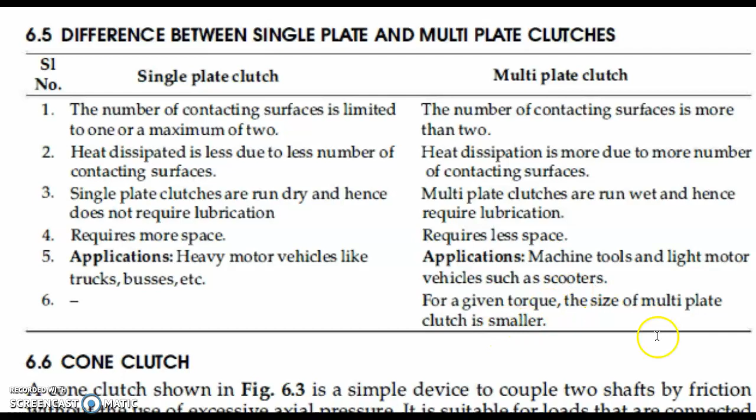Now we can identify or go for the cone clutch. First of all I can explain it with a figure. This one is a cone clutch, and the cup is attached to the driving shaft on the left side, and on the right side the cone is attached to the driven shaft, and the cup has a conical shape. There is a friction lining.

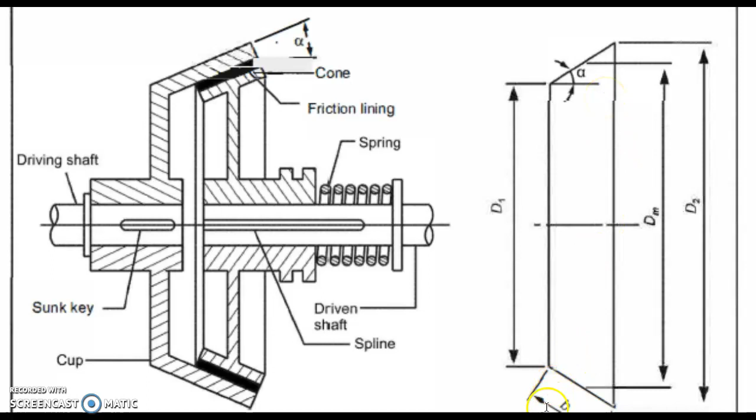It is rounded, so we have a conical shape here, and the angle alpha is necessary for the design. Then we need some values d1, dm, d2, as shown here. d1 is the internal diameter, d2 is the outer diameter, and dm is the mean diameter. One more thing, the value of b, that is the width of the clutch lining, is required.

Now we can go for the analysis part. First we can analyze the torque.

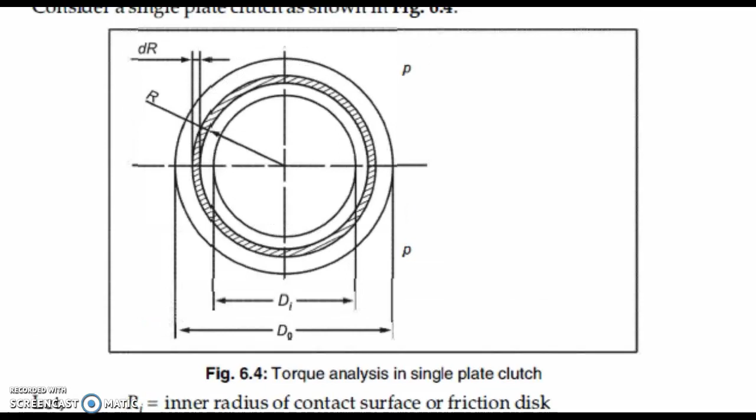This figure I already explained in the single plate clutch, but study once more. It is the side view of a single plate clutch, and we have two diameters. First one is di, the internal diameter, and another one is outer diameter, denoted as do. So we have di and do. Another one is r, capital R, the radius of the circle, and we consider a small element, denoted as dr.

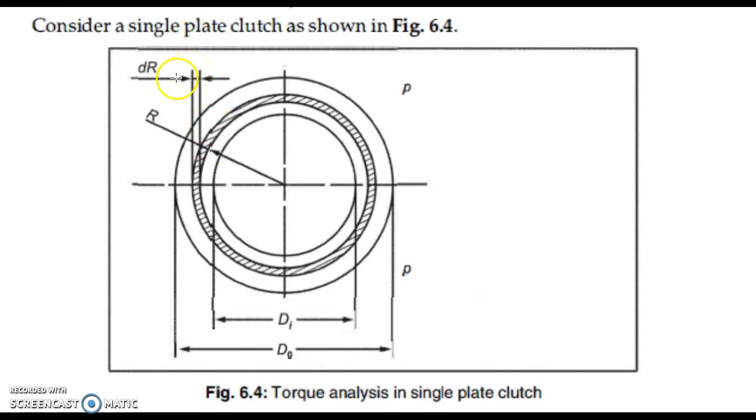These are the basic figures required for the analysis.

Consider an elementary ring of thickness dr at a radius r as shown in figure. Area of the elementary ring we can denote as dA, which is equal to 2 pi r into dr. Then axial force dFa is equal to P into dA, where dA is equal to 2 pi r into dr.

Now we can go for the frictional force. What is that frictional force? It is equal to coefficient of friction into axial force, which we can write as dFf is equal to F into P into 2 pi r into dr.

Now we can go for the torque equation. dt is equal to dFf into r, that is force into radius. We can write this as F into P into 2 pi r into dr into r, or dt is equal to 2 pi F P r square into dr.

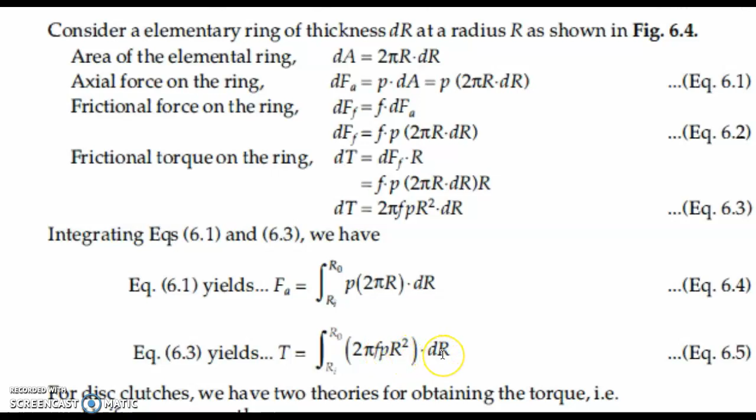Now we can go for the total axial force and total torque. How can we find the total axial force? It depends on the variable r, so we put it for integration: integral from ri to ro of P into 2 pi r into dr. Similarly, torque T is equal to integral from Ri to Ro of 2 pi F P r square into dr. These are the basic equations required for the analysis of torque and force.

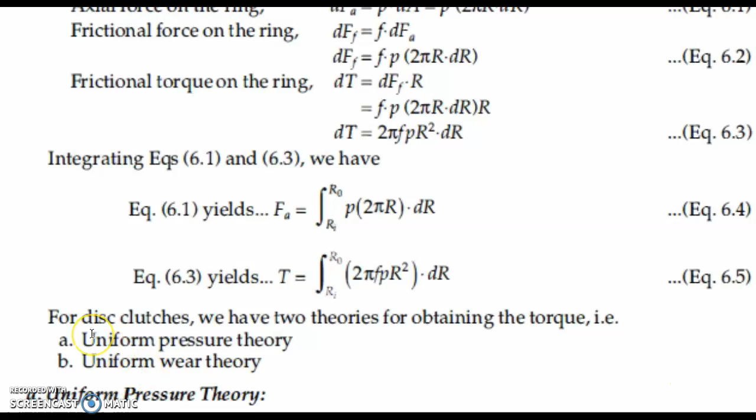Now we can go for the basic theories. We have two basic theories for a clutch: first one is uniform pressure theory, second one is uniform wear theory. These are two important theories used for the designing of clutch.

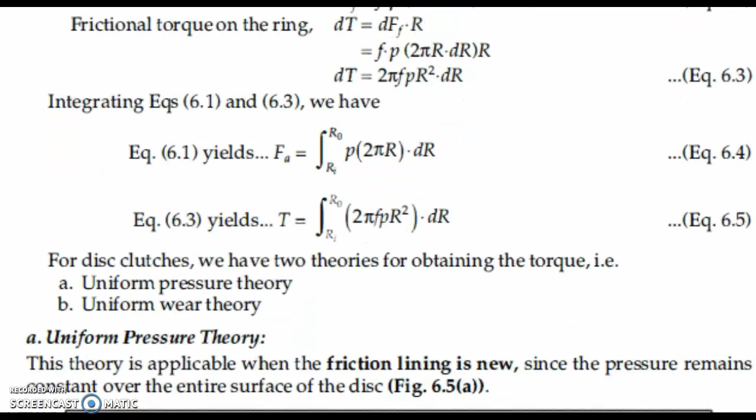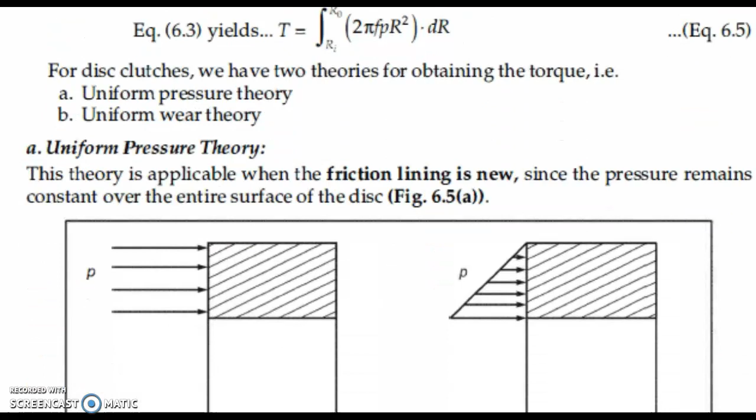The uniform pressure theory is applicable when the friction lining is new. Let me explain with this figure. The first figure is for the uniform pressure theory, because for a new lining the pressure will be uniform, so we can draw the figure like this.

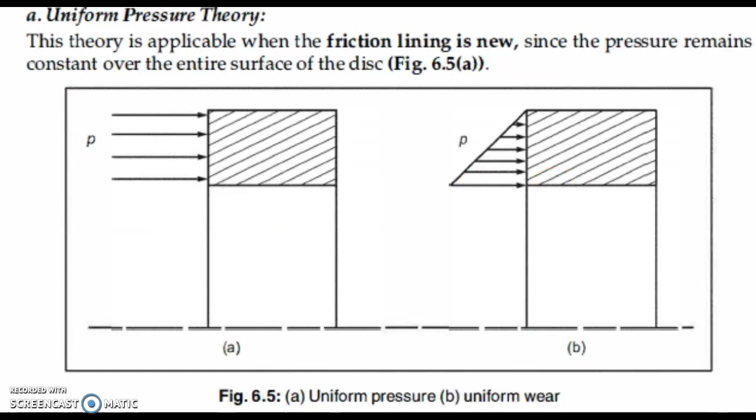But in uniform wear theory, there will be a slight variation in pressure, so we can draw the figure like this for the uniform wear theory equation. It is just for figure explanation. Now we can go for the analytical area.

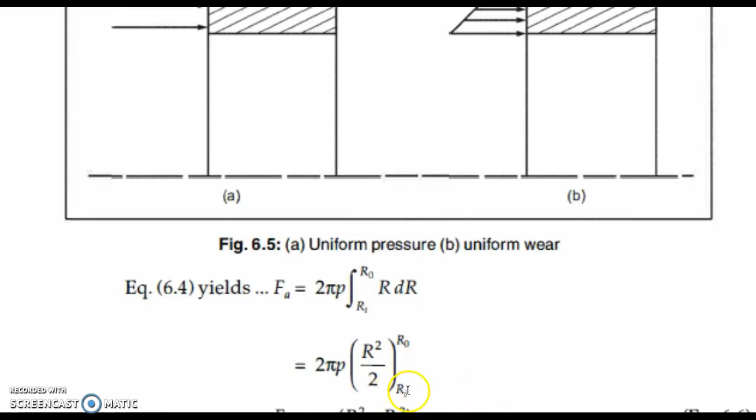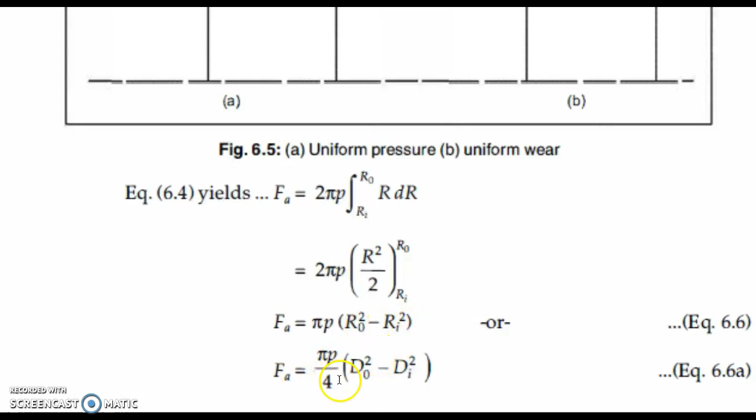We can write Fa is equal to 2 pi P into integral Ri to Ro of R dr, as already mentioned in the previous equation. Now we integrate: the integral of R is R square divided by 2, integrated with upper limit Ro and lower limit Ri. The equation becomes pi P into Ro square minus Ri square, or F is equal to pi P divided by 4 into dO square minus di square. So this is the simple equation.

Next we go for the torque equation. The torque equation is T equal to 2 pi F P into integral Ri to Ro of R square dr. Here we integrate R square, which is R cube divided by 3. So the equation becomes T is equal to 2 by 3 into pi into F P into Ro cube minus Ri cube. We already know the P value, that is equal to Fa divided by pi into Ro square minus Ri square, so we can substitute P here.

Then T is equal to 2 by 3 pi F into Ro cube minus Ri cube into Fa divided by pi into Ro square minus Ri square. So T is equal to 2 by 3, where F is the coefficient of friction, into axial force, into Ro cube minus Ri cube divided by Ro square minus Ri square. We can convert this into diameter instead of radius. Then the equation becomes T is equal to 2F into Fa divided by 6 into dO cube minus di cube divided by dO square minus di square.

I showed this equation because it is the general method of deriving the torque equation. But in our data book this equation is already given as T is equal to 1 by 2 F into Fa into dm, on page number 213.

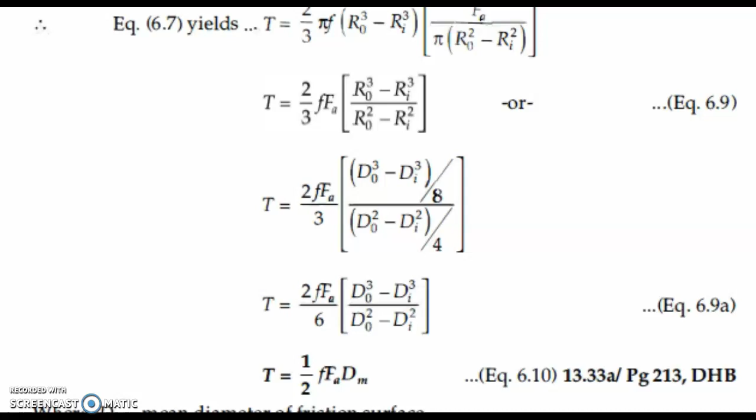From page number 257 in our data book, the clutch equations and figures are given, so we can use these equations from the data book. The torque equation is already given on page number 258, equation number 13.9b: torque transmitted by one pair of frictional surfaces, T is equal to 1 by 2 mu into F AP into D into mP. Here they are using P as a suffix also, so just compare this equation with our data book equation.

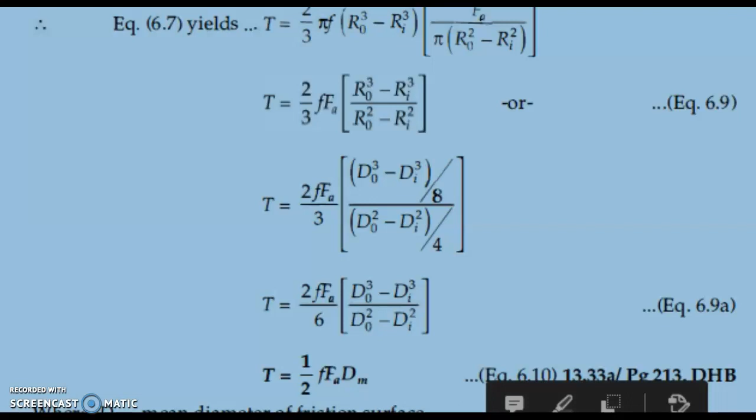Now the second one: uniform wear theory. This theory is applicable for a worn out clutch, based on the assumption that the wear is uniformly distributed over the entire surface area of the disc. So we can consider the wear theory here.

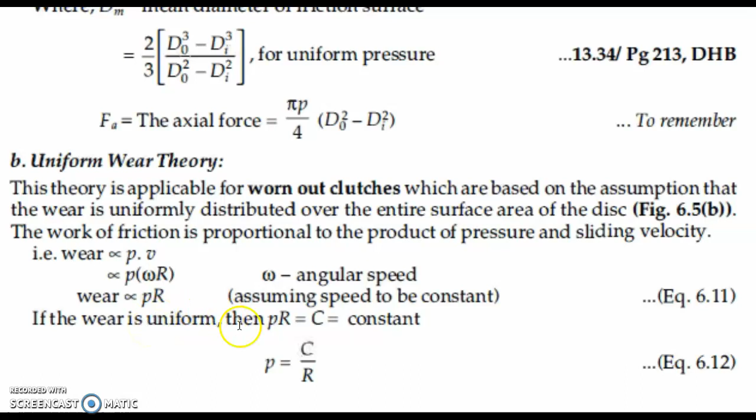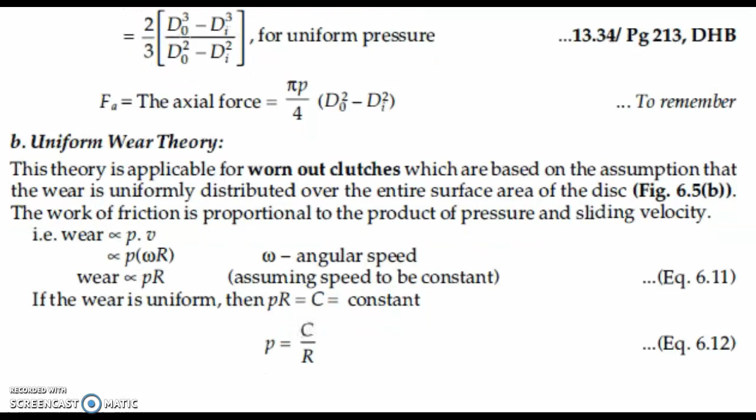Again it is similar to the axial force integration from Ri to Ro. We can write Fa is equal to 2 pi into C into Ro minus Ri. The value of C can be shown here: for uniform wear, we write P into R is equal to C, that is a constant, and this C is used in the wear derivation. Just understand this section, and here they are using the value of C.

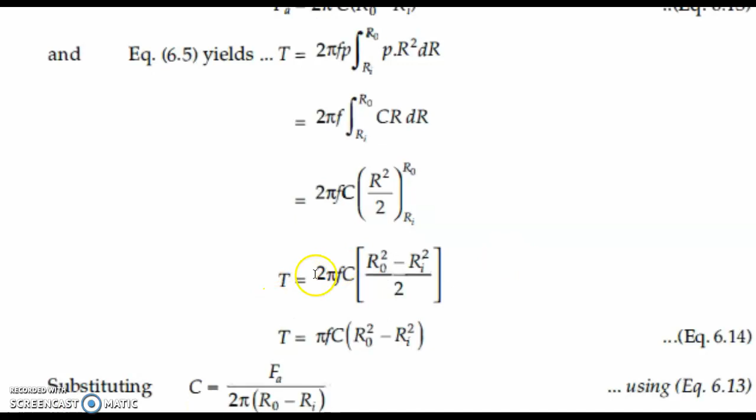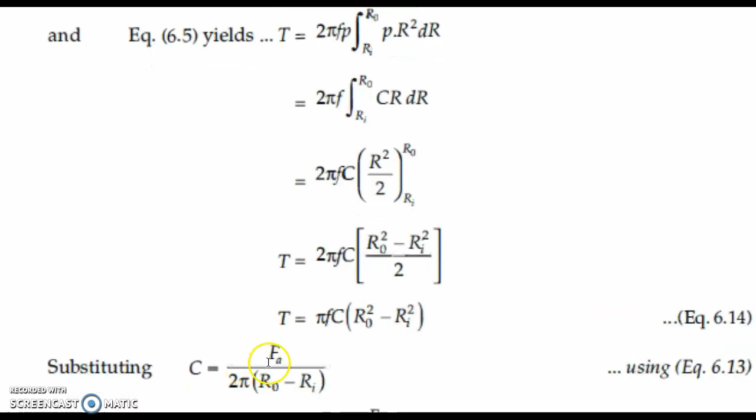Now we go for the torque equation, which is also similar. We can write R into P as C. Then the equation becomes 2 pi F C into Ro square minus Ri square divided by 2. Or we can write the wear equation as C equal to Fa divided by 2 pi into Ro minus Ri. Then the general equation becomes T is equal to 1 by 2 into F into Fa into Do plus Di divided by 2, or 1 by 2 coefficient of friction F into Fa into dm.

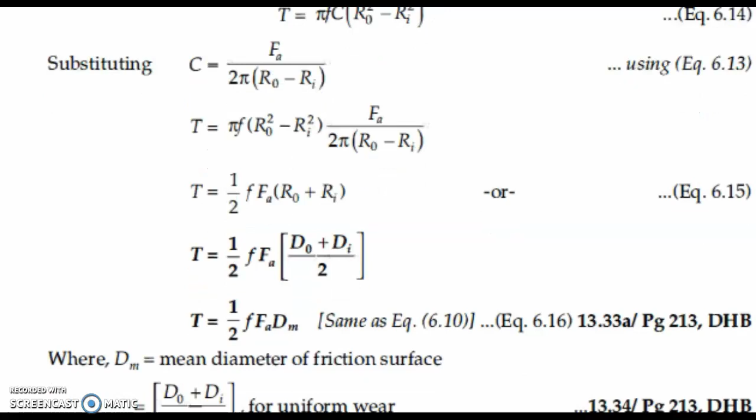This equation is already shown in our data book, page number 213, equation number 13.33a. There it reads: torque transmitted by one pair of frictional surfaces for uniform wear, T is equal to 1 by 2 f into Faw into dmw, where they use W as a suffix for the wear equation. For the uniform pressure equation they use dP, so both equations are similar.

So we identify these equations. Also just look through the data book and identify each equation and each figure in your data book. So from the next class onwards we can study the problems. Thank you.